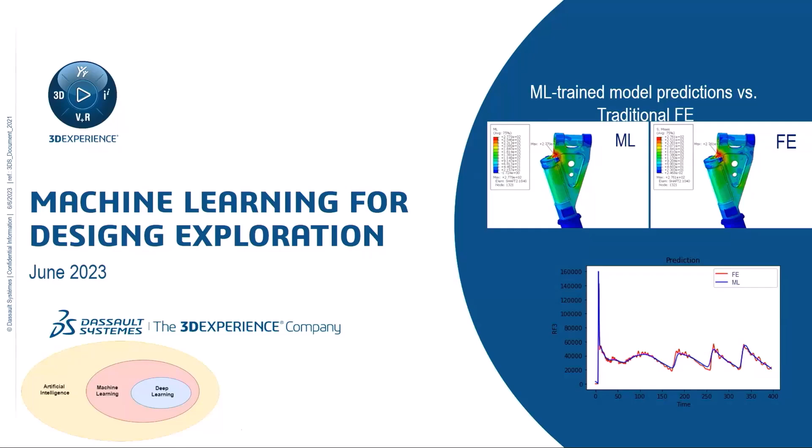Okay, so machine learning for design exploration. I would like to take you on a journey of what we have been doing the past 9 months or so in this area, some successes that we have attained, and to tell you where we are and where we're going in the next year or so.

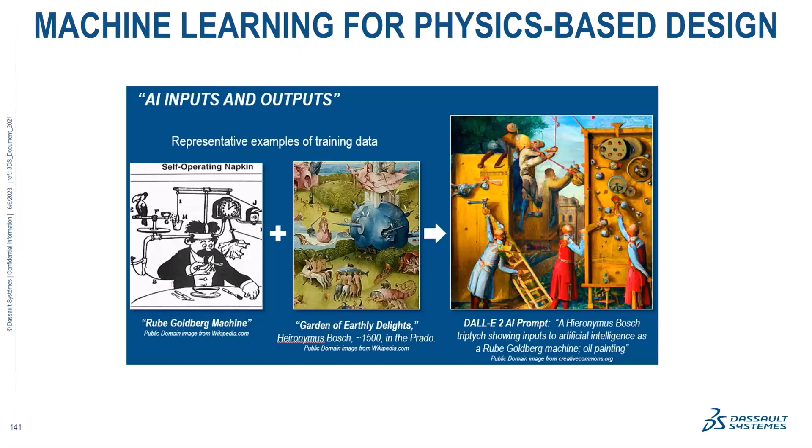So this is a picture. What can AI do for you? And Delphine mentioned ChatGPT this morning. Can you combine an image from the left with the style of the cartoon on the left with the picture in the middle and create something new? And it's incredible to think that today this is quite achievable, very easy. Multiple software packages can do that. Obviously not too relevant for what we do here at SIMULIA and DS, but can one rapidly combine previous knowledge into new designs, let's say, as a little bit of a parallel here.

Okay, a little bit of a grand statement, perhaps too much. Let's come a little bit down to earth from that. You've seen from us models like this that have to do with multi-physics-based simulations for heart models. Here's a bit of a thermomechanical, electrical, fluid type simulation, very sophisticated. We spent years making it functional.

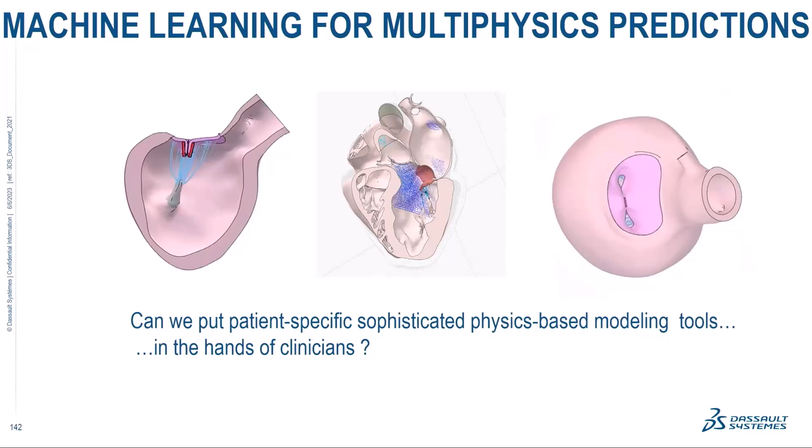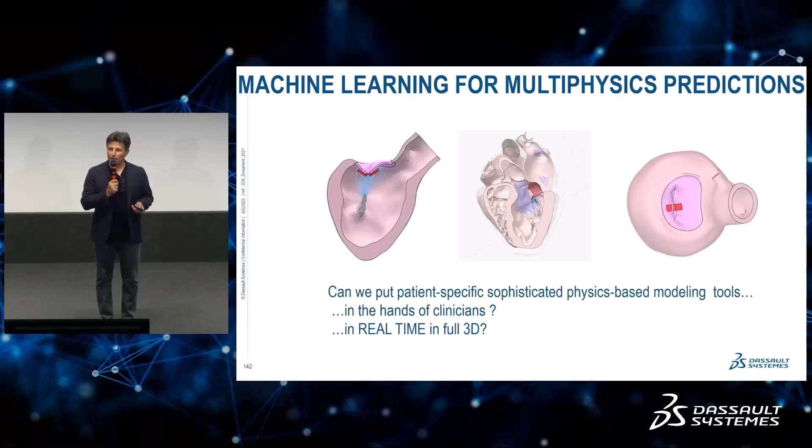It can be used for simulations of pre-surgery type operations to clamp the valve in a virtual heart like this, but it's way too expensive. Obviously, as it is today, it cannot be put in the hands of clinicians. So the idea is can we make this a lot faster, such that if you put it in the hands of non-experts, this becomes something that can become a predictive tool pre-operatory, let's say, for a surgeon. So the answer we have for this, we call it high-fidelity 3D surrogate models, just to give it a name.

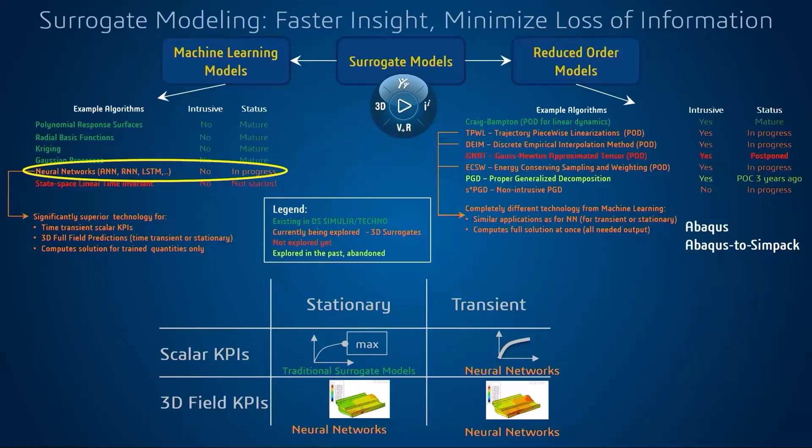But very importantly, for the bottom row here, if you're trying to predict 3D field KPIs, by far we think deep learning or neural network type technology is far superior compared to the rest.

Before I dive into some examples to hopefully convince you that we have something promising, let's see how we do things here. Machine learning for 3D design exploration: we divide it into 3 phases. First, parameterized models. What do we mean by that? Geometry, dimensions, thicknesses, composite layups—whatever can be parameterized from a CAD perspective.

But also loads and materials. Loads can be specified of any kind over whatever ranges. Materials can be swapped in and out. In a nutshell, that's what we mean by parameterized: geometry, loads, and materials.

Then we run a DOE, a design of experiment, over that parameter space, whatever it is. It'll get clearer with examples. Then we take the data from these many simulations and prepare it for machine learning. Out of all 3 phases, this is definitely the most expensive—running a bunch of simulations takes anywhere between hours and days, and it's the most expensive phase of the entire process.

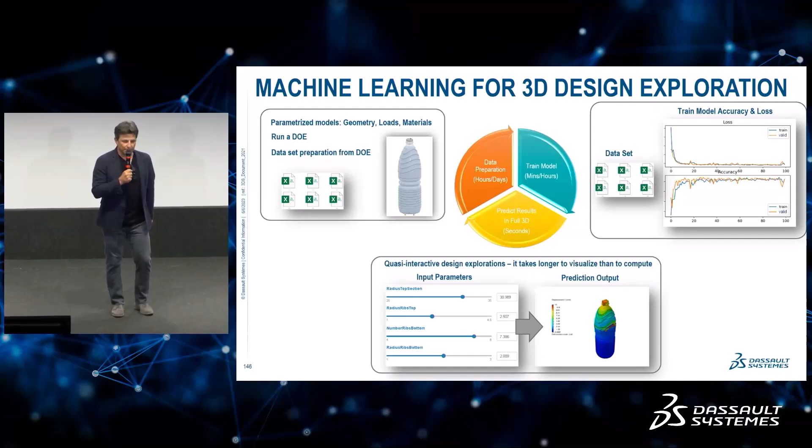On the top side, you see train a machine learning model. You take the data and feed it into a process that trains a machine learning model, and what comes out is an executable, just like any other, that takes inputs and produces outputs. The inputs are shown by the dials at the bottom when you're trying to make a prediction—you train the model, and now you get a prediction from that model when you change the parameters, whether geometry, loads, or materials.

You see here some 4 geometric parameters input into the machine learning model, and out comes a contour plot like you see here on the right. So altogether: run a DOE over a parameterized space, train a machine learning model, and use that model executable to make predictions for designs you haven't run simulations for.

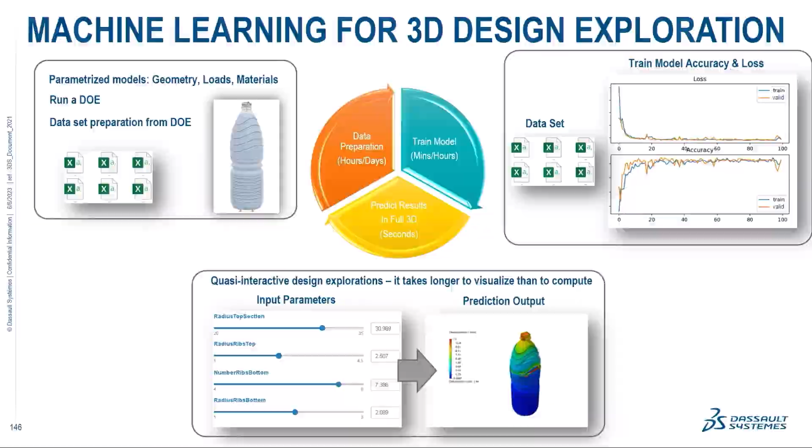That's the overall process, and we try to convince ourselves it's actually working. Are these predictions accurate? Are they accurate for transient KPIs and 3D field outputs, whether you're predicting one frame of data—like a stress contour at the end of a multiphysics simulation—or a full animation of deformations or stresses, whatever's necessary for decision-making?

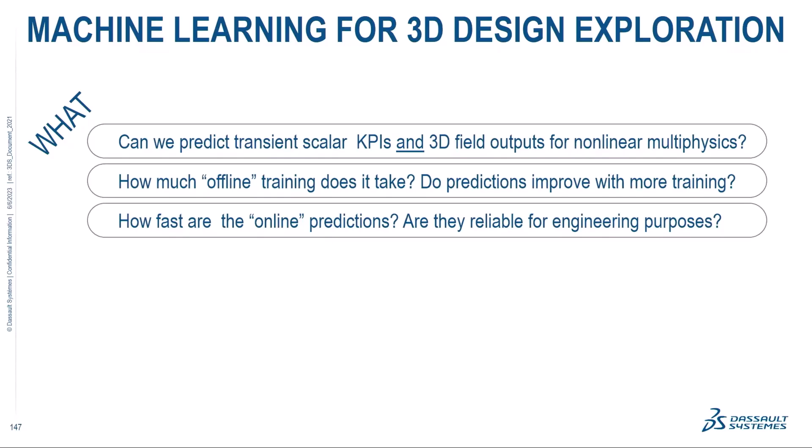How much offline training does it take? I'll give examples in a second. Do predictions improve with training? Are the predictions reliable? Are the models accurate enough that you can make engineering decisions consistently with a high degree of confidence?

To demonstrate this to ourselves and to you, we looked at 8 highly nonlinear multiphysics applications. 6 are Abaqus-centered but not just Abaqus, 2 are fluids, and we're working on electromagnetics and multi-body dynamics applications as we speak. M1 through M6 at the top: a tube crush, a landing gear, a heart valve from the heart model shown before, a welding application, a bottle, and a battery pack.

In all cases we have parameters. For M1, we have 4 geometric parameters—3 dimensions and a thickness. For the second one, we left the geometry the same but varied the loads—can we do design exploration via machine learning in that case? For M3, we combine everything: swap in materials, different geometry parameters, different load histories.

Model 4 looks at process parameters for a welding process, as listed there, and M5 and M6 go back to geometry-type parameters. The idea is: can we predict the KPIs listed at the bottom?

So let's say on the left, KPIs for the scalar RF reaction force, if you're an Abaqus person, and 3D deformation. You see in the little inset at the bottom of the screen on the left side an XY plot that shows the reaction force as a function of time.

When we show curves like that in all plots that will follow, red will be an Abaqus reference solution, and blue will be a blind prediction from the trained machine learning model shown on top. I'll show comparisons in detail as we go along.

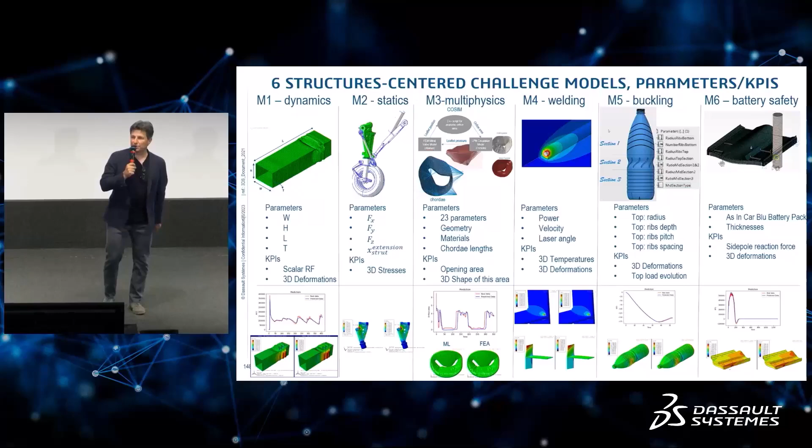At the bottom left, you see two 3D contour plots. On the right side, we show an Abaqus reference solution, and on the left side, a machine learning prediction model in a blind prediction type sense.

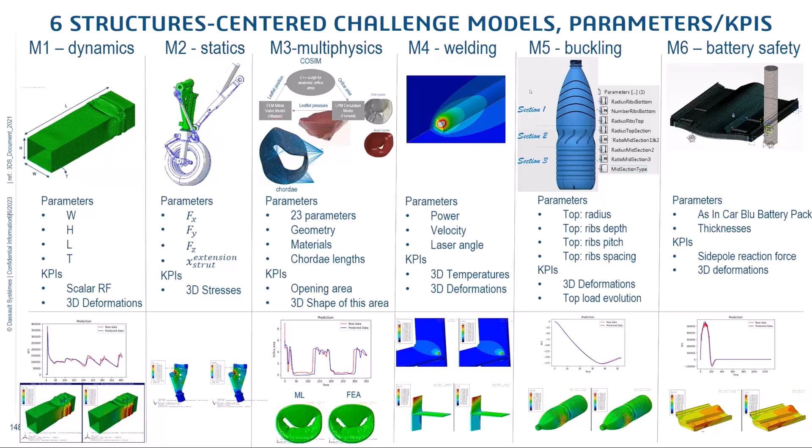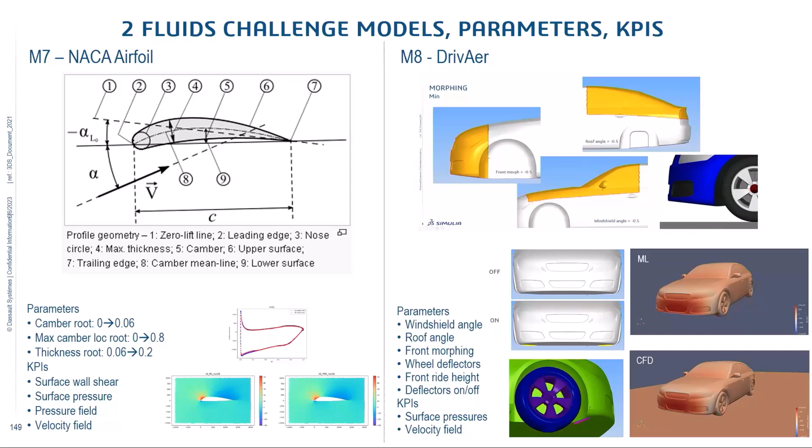Everything I'll show will be in a blind testing prediction type environment. We also did two fluids applications: one on an airfoil, where for 3 geometric parameters we predict all the things listed at the bottom left, and a more complex full car application, predicting contour plots of pressures and fluid velocities around the car through a machine learning technique. I'll pause on that example towards the end.

Perhaps what I'll do next is go into more detail about the first example, just to give you a sense of what we do. So, tube crush, model number 1. If you work in automotive, you may be familiar with this test. We're looking at a rectangular cross-section type tube here.

There is a big mass on the left side of the tube, fixed at the right end with the gray wall. When that big mass hits at 35 miles per hour, it produces a deformation mode that's energy absorbing, called an accordion type mode. Automotive companies work quite a bit to try to optimize that mode such that the energy absorbed is optimized. You see here 4 geometric parameters, with the ranges listed on the second line under the bullet.

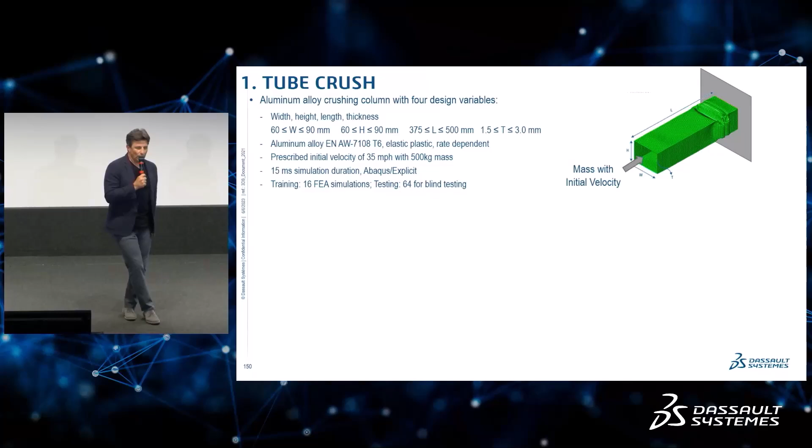If you picture the ranges, they are fairly large, not quite small as far as how big they are for a design space. We use one elastoplastic rate-dependent plasticity model—it's a real automotive material model, not a made-up, simplified thing. One more time, elastoplasticity rate-dependent.

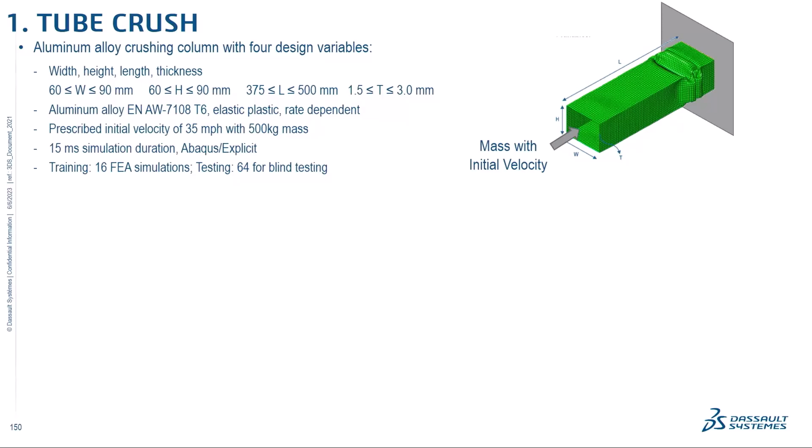We run 15 milliseconds of Abaqus/Explicit type analysis. The idea is, can we predict the reaction force on the gray wall? Can we predict the deformation pattern?

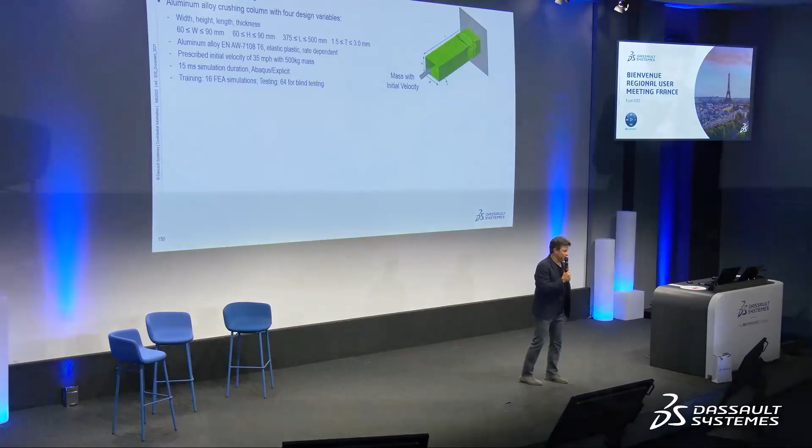The way we did it is we run a DOE with 16 simulations—16 Abaqus runs. We collect the data, train a machine learning model, and then perform 64 blind testings to verify that our model is correct, again over the same parameter space listed at the top, but at very different points in the design as far as the 4 parameters are concerned.

When you do that, you get something like this. On the right side is the Abaqus reference solution, on the left side is the machine learning blind prediction. You see prediction number 10 out of 64 as listed there. Out of the 64, we're showing just one because of economy of time.

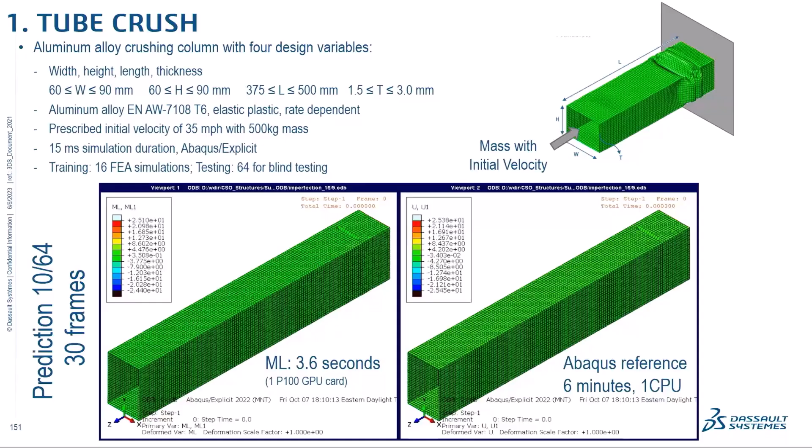We are predicting all 30 frames that came from that simulation. Do we claim they are identical? No, they're not identical. Can you make design decisions based on the information on the left, if that helps you when compared to the information on the right? We think so—but that's something for you to decide if you decide to work with us.

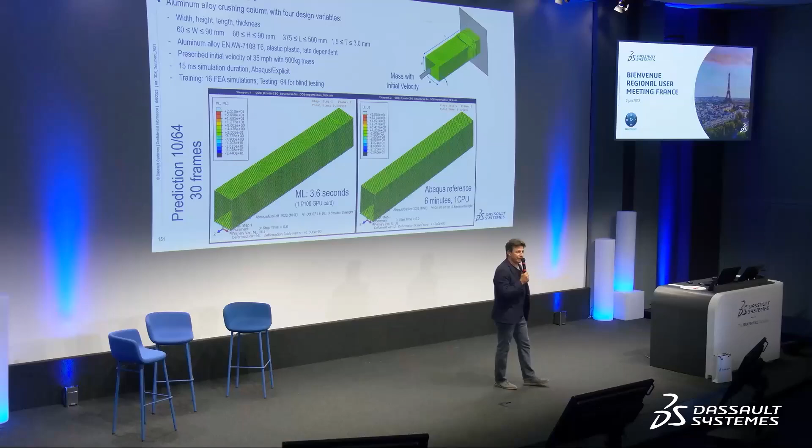Just to give an example of execution time, Abaqus—this is a very small Abaqus model—takes about 6 minutes to run on one CPU. Machine learning takes about 3.6 seconds to execute the 30 frames of data. In general, for a machine learning predictive model, it takes more time to plot than to compute. So that's the first example, and hopefully that paints a picture for you.

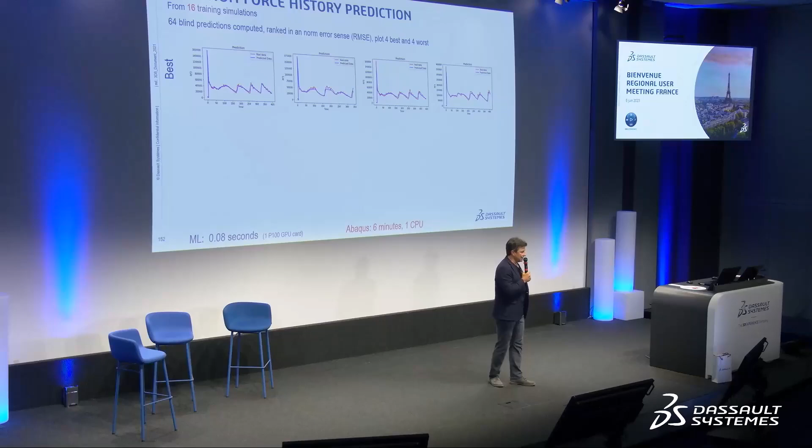How about reaction force on the wall? Again, we trained from the 16 training simulations I mentioned before, then did the 64 blind predictions again, and ranked all the results from these 64 in a norm error sense, an RMSE type sense.

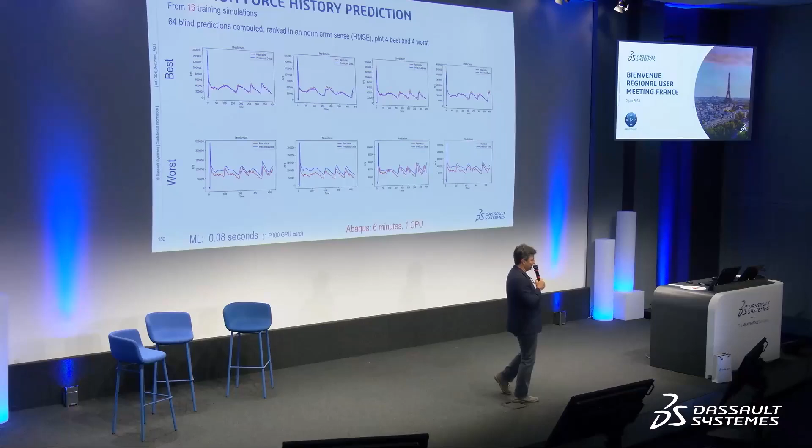We did that separately, and now we're plotting the 4 best at the top and the 4 worst at the bottom. The 4 best look pretty good. Can you make a decision based on blue, the machine learning prediction, versus red, the Abaqus reference solution—again, a blind testing environment? We think so. If you look at the worst out of the 64, though, the results are not so great anymore.

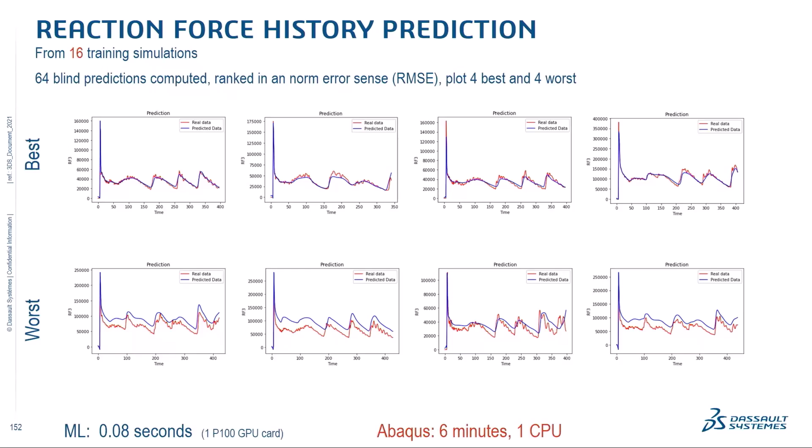The idea is that it's way faster. It takes 80 milliseconds to produce a graph like this, but it's a little bit inaccurate.

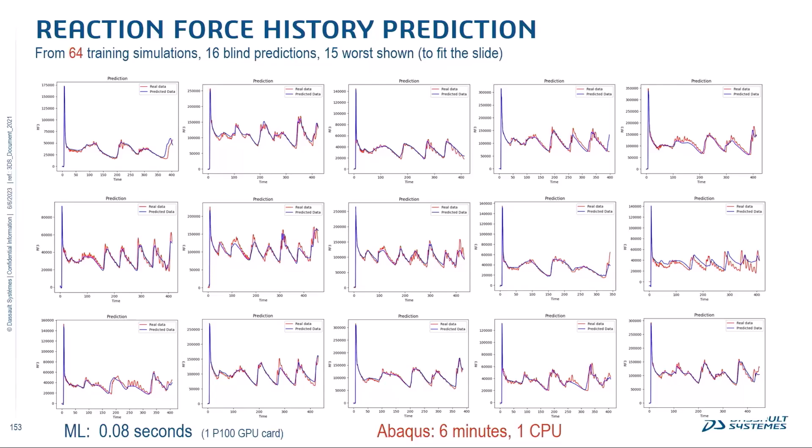So now, if you see training from 64 training simulations, we revert the two sets: 64 for training and 16 for blind predictions. We're showing the 15 worst on the slide here, because otherwise they would not fit. The worst one is on the middle row at the right extreme, meaning the results got a whole lot better with more training.

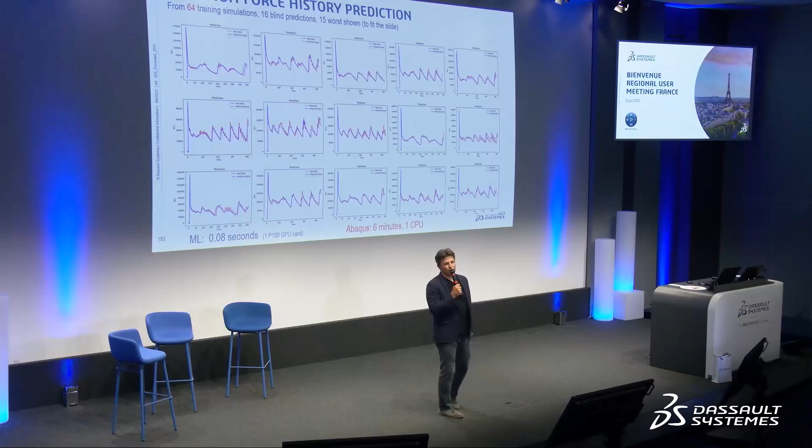Just to give you a sense, the training period here took about an hour and a half on a P100 card, if you're familiar with NVIDIA cards. That's pretty fast for this model, but this is a small model. We'll get into a more serious example in a second.

So that's example number one. Perhaps it shows a little bit that we think these methods have a chance for highly nonlinear applications, for both 3D field predictions and also for XY plots, like reaction forces, whatever - if you're an Abaqus person, it's a history output in Abaqus.

Here's a second example with landing gear. We kept the geometry just the same. The idea is that can we predict over those ranges for fx, fy, fz, and if you look at the numbers, it's quite a wide range for mimicking landing loads. Can you predict the stresses in the green part over there?

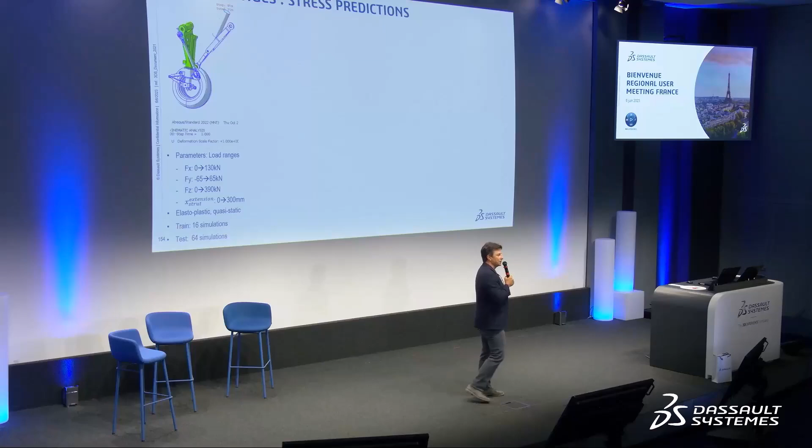This is an elastoplastic type material. It's a large deformation type analysis. The idea is to see how accurate the results are.

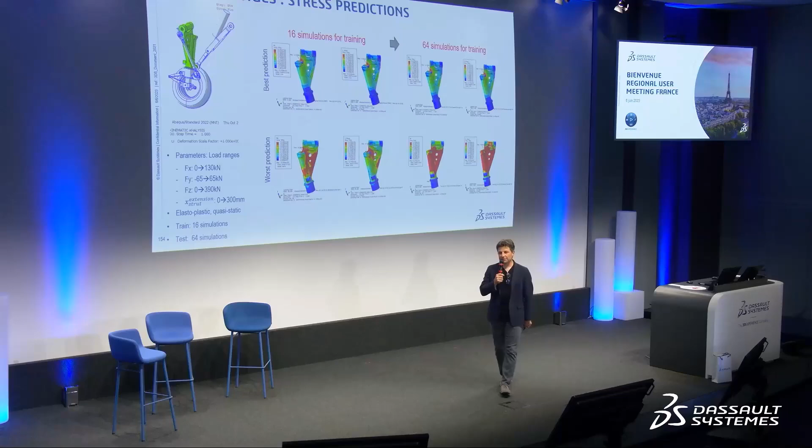Same idea, now if we revert and train from 64, the top right best results remain pretty much the same, but the worst result gets a whole lot better compared to the left side of the slide. Are they identical? No, you still see some differences in red on the cylindrical part at the top.

But again, can you make a decision now based on this stress contour plot from machine learning versus the one computed by Abaqus reference? We think so. And again, it takes about 5 milliseconds to compute a frame of data like this - it takes longer to plot than to compute.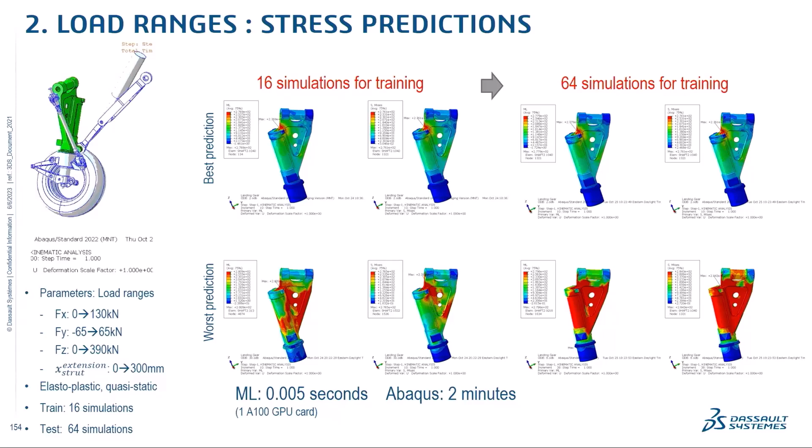Okay, so perhaps this is the most nonlinear example that we have done in multiphysics, if you will. Example number 3: the idea is that it's a co-simulation exercise between Abaqus and Dymola. If you're familiar with what Dymola is, it's another product that we have from CATIA Systems in the Dassault Systèmes family.

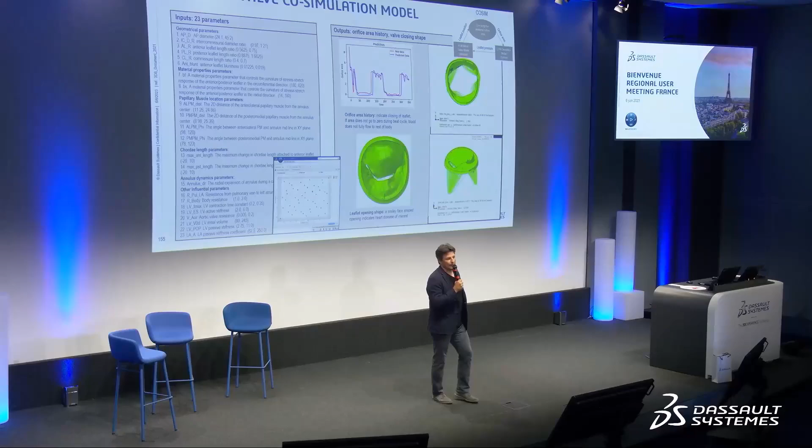So there's 23 parameters in this setup. Just to look at the geometry a little bit, and I'm going to talk only about the first parameter: if you look at the center bottom figure, there's something that looks almost like a circle from a top view. That diameter varies anywhere between 24.1 millimeters to 45.2 millimeters - from children to adults, it's quite a wide space as far as the parameterized geometry is concerned.

And we apply pressures on the top and the bottom of the leaflets of the valve. They close, they open, like in a systolic, diastolic type cycle. As far as the heart beating is concerned, we show in the XY plot 2 beating cycles.

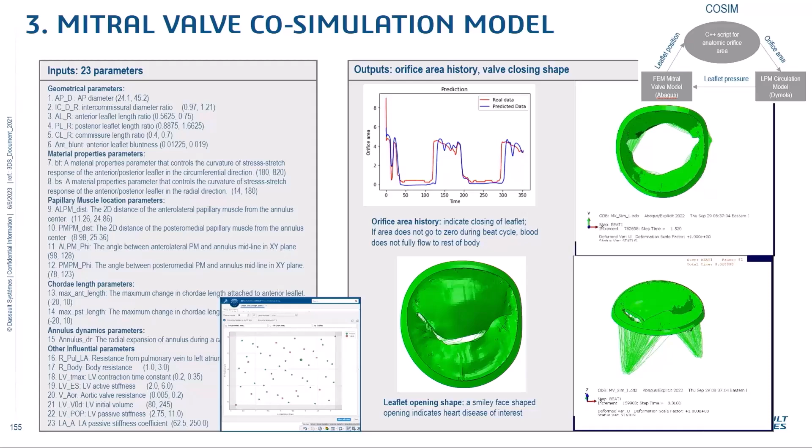Now, we have 23 parameters, so a whole lot more than before. Therefore we need to train from more simulations - this is 540 simulations now we train for. Quite a handful. Just to look at the bottom right here, it says the Abaqus reference solution for each of these simulations takes about 54 core hours, or 2.7 hours on 20 cores. It's still a small Abaqus model, but it's pretty intense from a numerical perspective.

To produce a frame of data with machine learning algorithms, trained algorithms like this, it takes about 0.24 seconds. So again, it takes a whole lot more to plot than to actually compute.

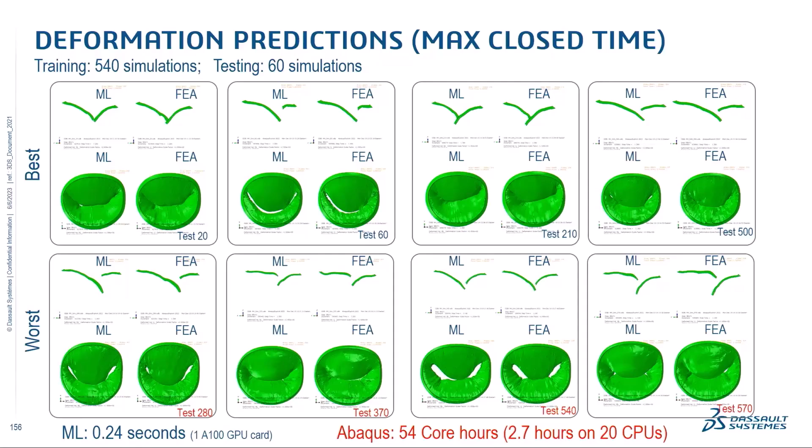In each panel, we show on the right side an Abaqus reference solution, and on the left side a blind prediction by machine learning. You make up your own mind as far as how good it is. We think it's pretty good. Are they identical? No, they're not identical, but can you use the machine learning trained predictions to make decisions, if you believe the full 3D results from Abaqus?

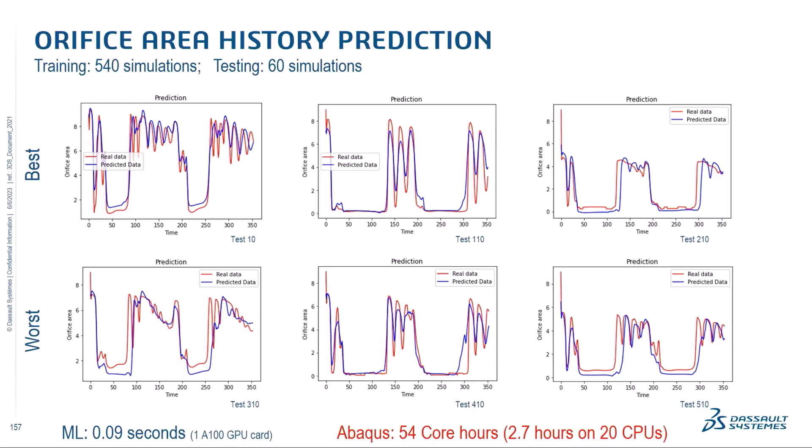We think so. The curves here represent the area of the opening, basically the fact that the valve is not closing. Red is an Abaqus reference solution, blue is a machine learning prediction. Again, not identical, but pretty close for a highly transient application with very nonlinear materials, hyperelastic, viscoelastic, with a lot of connector modeling in the tissue, healthy tissue, diseased tissue, and so on.

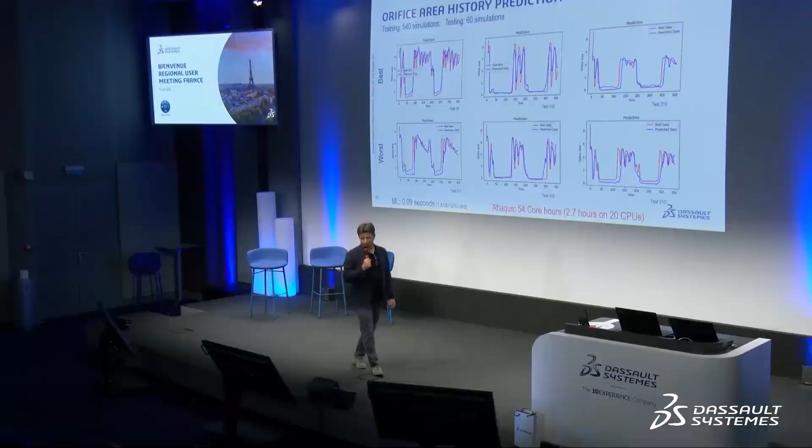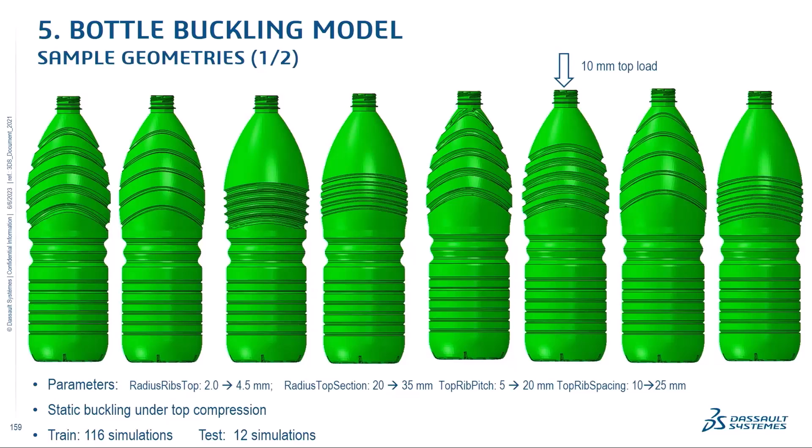Let's keep this example, the bottles example. Here's some sample geometries that you just saw, flipping them back and forth, a pretty wide design space. We show some sample geometries here to get a sense of what the design space is. We apply a load at the top, elastoplastic material.

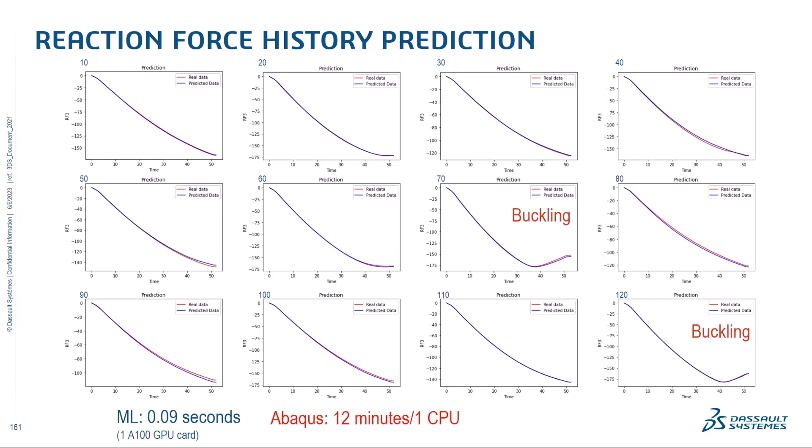You get the idea. If you plot reaction forces here, you can barely tell them one from the other, machine learning versus Abaqus, including the ones labeled buckling, where the curve goes from downwards to upwards, meaning an instability is being captured as well.

Last example I want to show from the Abaqus side, a battery pack with 120 parts in this model. So far I've shown one-part examples; now this is an actual assembly, side impact of a battery pack.

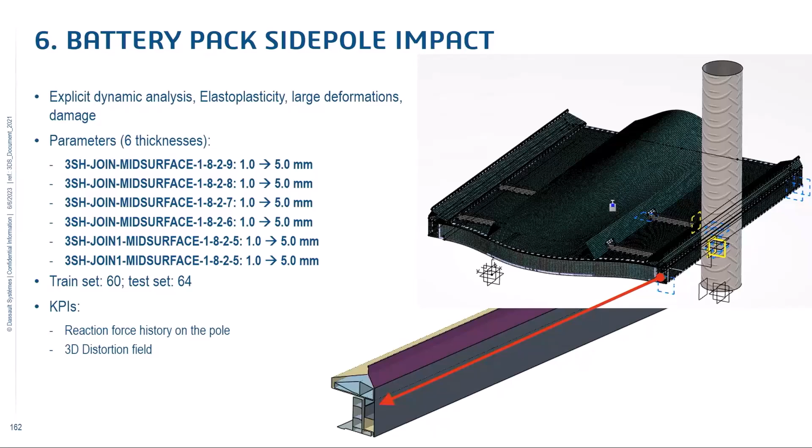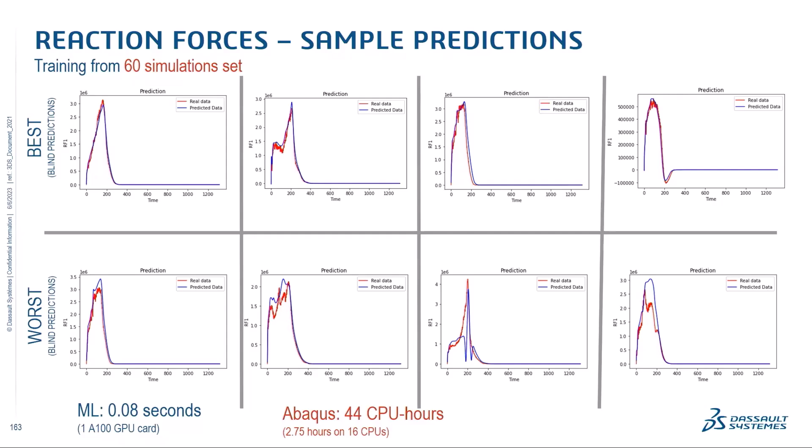If you had to design the rocker arm, the one zoomed in at the bottom center, through a range of thicknesses like you see listed there, how can this happen? If we train from 60 simulations, we show the best results at the top, blue versus red, quite close to each other. The worst one, not so good, at the bottom, but again same idea.

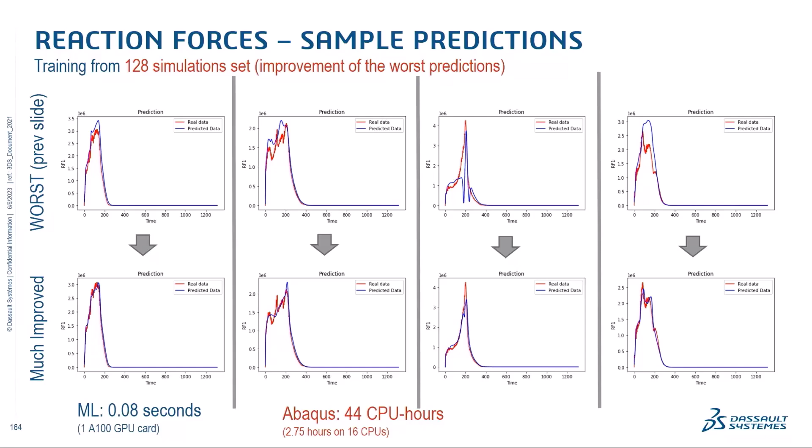If you train from 128 simulations, the worst results before become much better with more training. And again, it takes almost no time to predict that kind of result.

Same idea for the 3D deformations. If you're looking for such deformations, you can focus only on the 6 parts that you're actually after to redesign, as we show at the top.

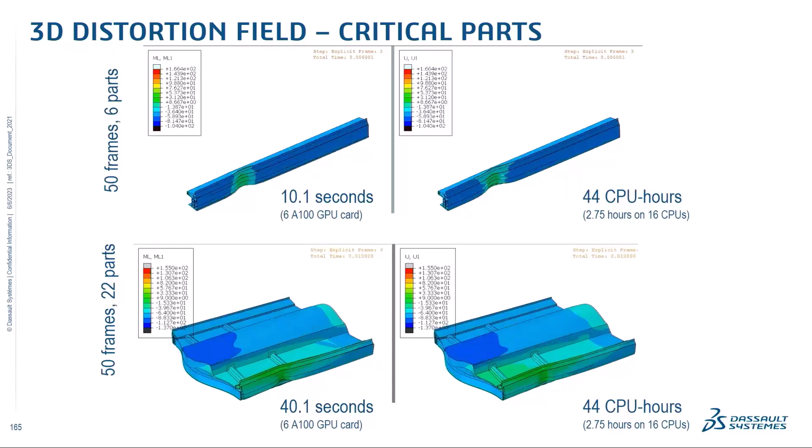We produce 50 frames of data from the machine learning model here, compared again on the right side with an Abaqus reference solution. At the bottom for 22 parts, things are quite accurate, without claiming that the results are identical. And I'll show this example for CFD applications.

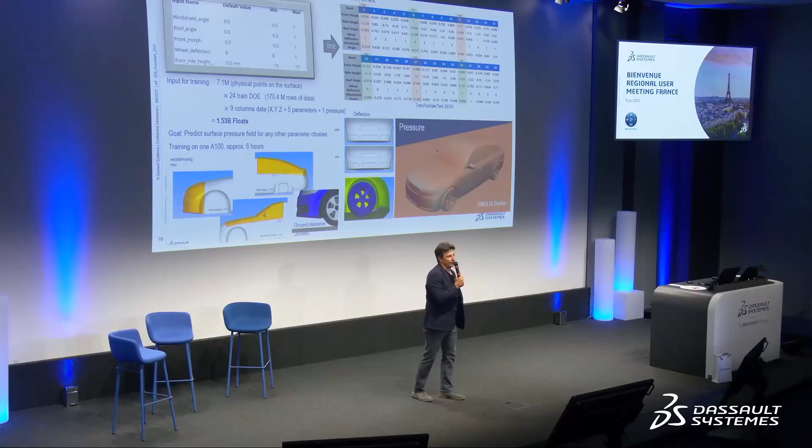We heard about LBM for turbo machinery this morning. This is LBM modeling of airflow around the car for drag coefficients and so on. You see playing at the bottom the morphing parameters used to span the design space on the bottom left, in terms of car dimensions and shapes.

In addition, the deflectors you see a bit in the center panel are either on or off. We run a 24 training set to train a machine learning model, and the idea is to see how well we do as far as predictions are concerned in this case.

If you look at pressures, CFD in this case, Lattice-Boltzmann with PowerFLOW versus machine learning on the left, even in detail, mirrors and tires and whatnot, things match quite well.

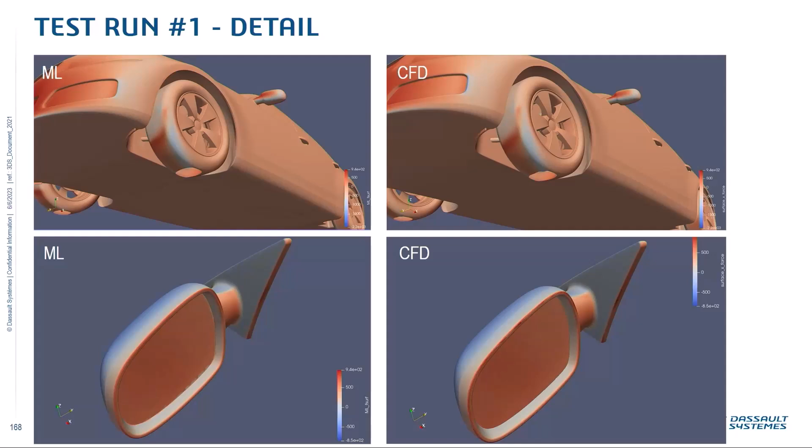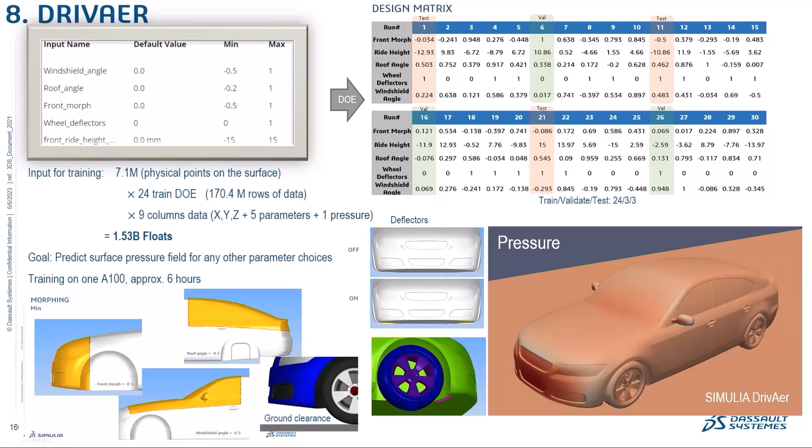I want to point out the amount of data used for training, in this case in total, 1.53 billion floating point numbers, so a massive data set. There are about 7 million points on the surface of the car where we predict pressures in this case.

All right, so a quick look into the future. We are producing apps to leverage all this technology right now. They will probably be available in the first half of next year. They will be part of the design exploration family of 3DEXPERIENCE apps that we already have.

It's going to be called Performance Guide. We're going to use this technology underneath to train machine learning models. It's going to offer an environment to collect data, run the DOE, train the machine learning model, set your own expectations, and bring your own IP if you don't like what we do in there.

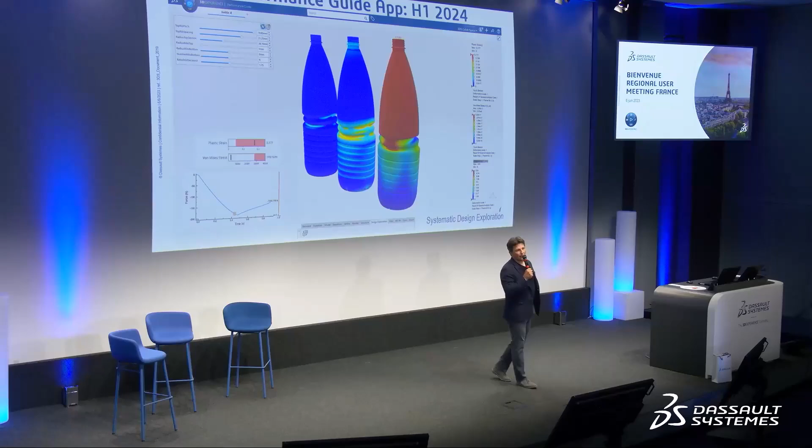And in the end, at the inference or prediction stage, you're going to get views like this, with dials at the top left, views for the key KPIs you chose, like stress, plastic strain, etc., shown in the view, and at the bottom a reaction force plot as an example of what things you could look at. First half of next year.

Just to give you a sense of how this is going to look like, this is a video that is not sped up. This is for real. It's not any quick speeding up of the screen recording. So what's happening here: apply the parameters. If you see, click—it's going to play in a second again, I think. Probably not. Let me see again.

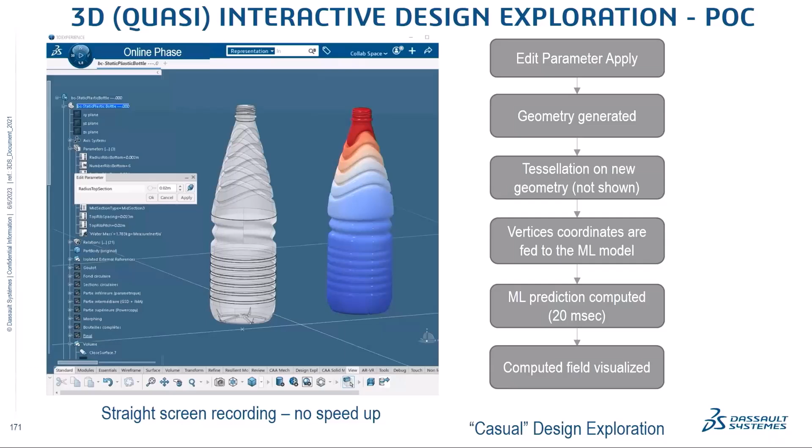This is, again, what you should kind of expect for sometime next year. So that's kind of a quick view into the future.

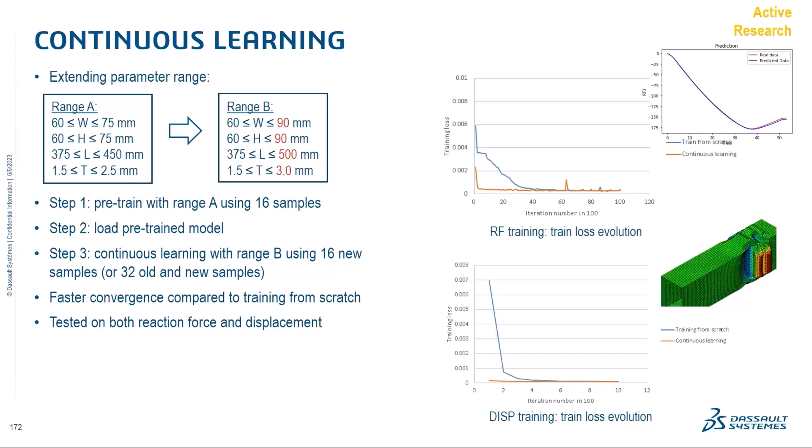We're also working on other activities in terms of improving the technology, meaning the topic of continuous learning. You run simulations over the years—can you leverage all simulations into new workflows? And we're learning how to do that today.

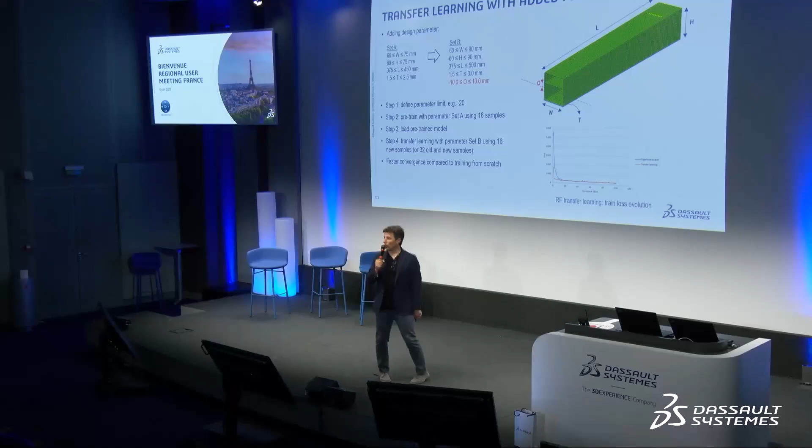If you add a new parameter, the O parameter in here, the learning that you've done in the past without the middle wall can be leveraged such that something with the O parameter included is much faster in the ability of training a new machine learning model. And again, we show here bottles, but this applies to many products.

If we have a model in 2023, this topic of geometry encoding or auto-encoding—maybe some of you have heard of it—how can it be used so that you come up with a bunch of geometries that are not parameterized, and bring them into the mix here to come up with a second generation machine learning model in the middle.

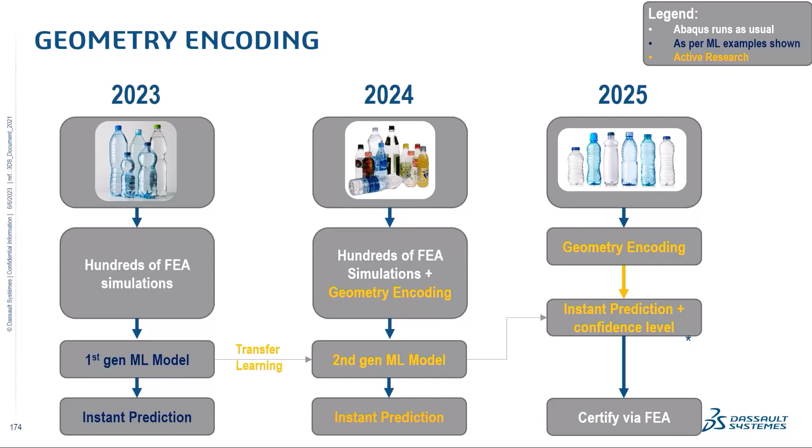And for 2025, let's say as a metaphor, the idea is that you might not need to run an Abaqus simulation—the one in white font at the beginning in the design exploration stages—but only do it for certification at the end, to speed up the design process that you have. And if it works for bottles, it might work for these things too. We don't know yet—that's active research, as you see here in the top right.

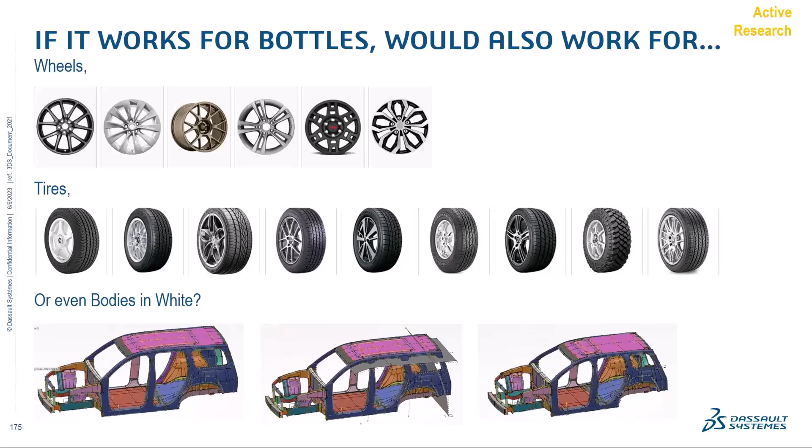We are ready to engage now, though. These apps are coming next year.

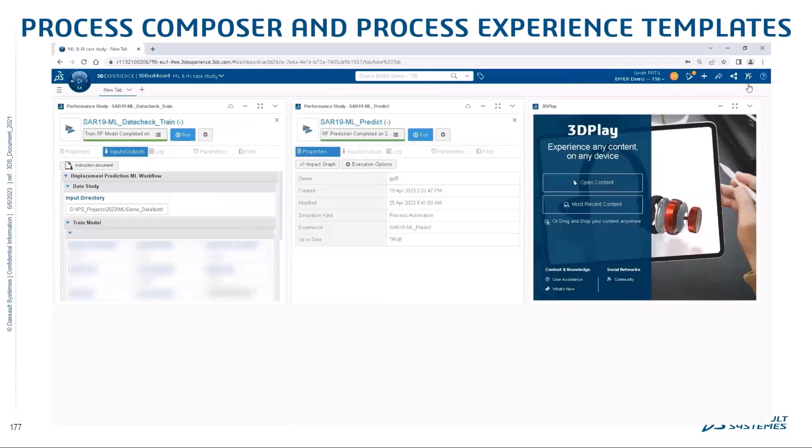We offer already an environment to train, to run the DOE, to train, to explore the training, get the dials like you see playing here for predictions, to look at 3D plots like you're going to see in a second playing on the right side.

This is definitely sped up compared to what I've shown before, so this is not the speed that you're going to get today, but the previous video was real-time.

Can you formulate a problem that you think this might be useful for your enterprise? And if you can, spend no more than one slide on it. Think about it, then we have another discussion, we iterate, and perhaps we have a project—we already have a number of projects going on like that in various industries across the globe.